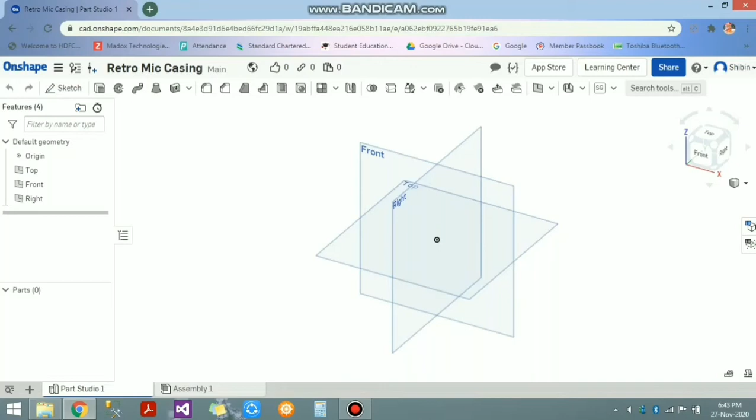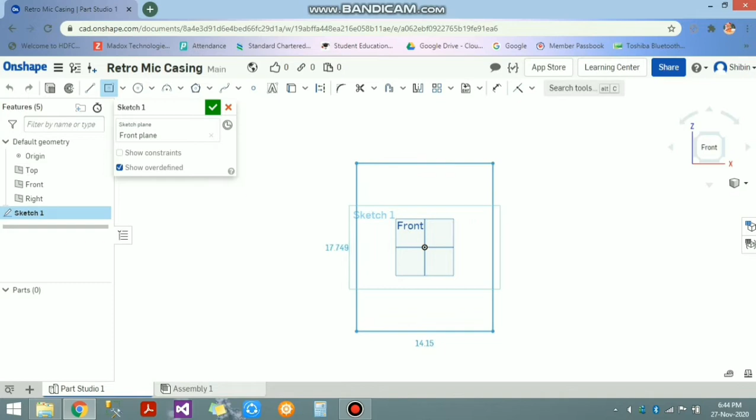There is something really beautiful about retro things, right? So today we'll be making a retro microphone's casing. So start off with the usual steps and click on sketch. Now we'll take a center point rectangle and I'm going for a 10" by 8". So start dimensioning it. Okay, 10, and this one should be 8.

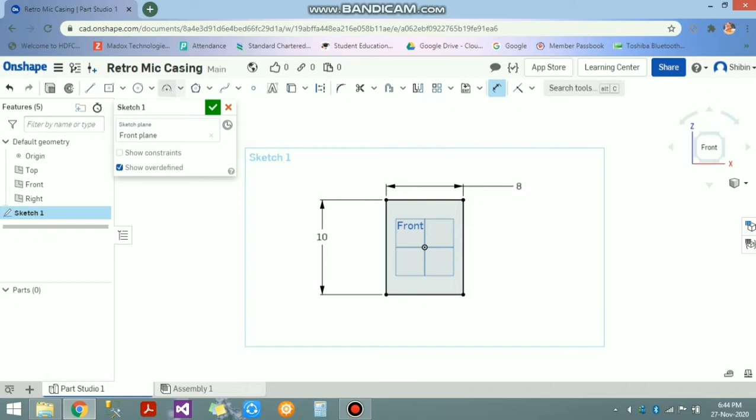Okay, now once that's done, go to arc and select a 3-point arc. First point here, second point here, and don't go for a tangent. All right, this is a tangent. I don't want a tangent, and somewhere here.

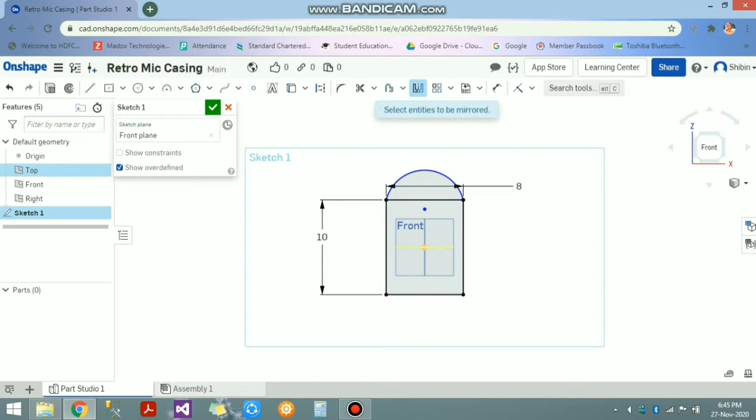Now I need that on the bottom also, so I'm going to mirror it. So click on mirror. It's asking for a select mirror line, right? Click on this line. That's a top plane, and select the entity. That's the arc. Okay, we got it. Now let's remove the unnecessary ones. That is this one. Okay, so this is a sketch that I wanted.

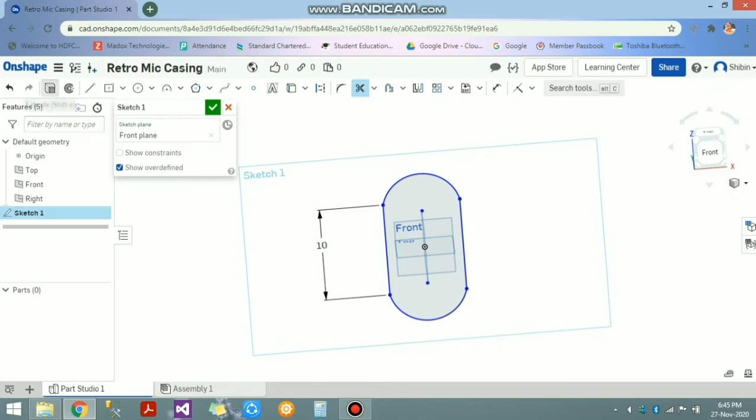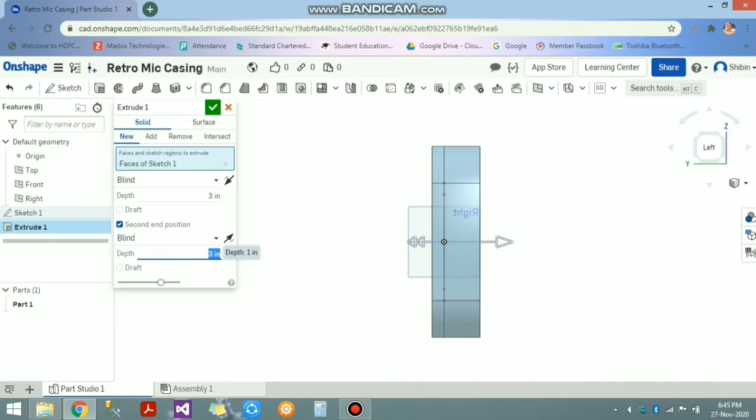So let me just extrude it. Now I go for a 3". Now what if I want another 3" on the opposite side? So you can see an option here, right? Second end position. Click on that. See, there is one extrude happening on the opposite side also. Mark that also 3". And this is what I want.

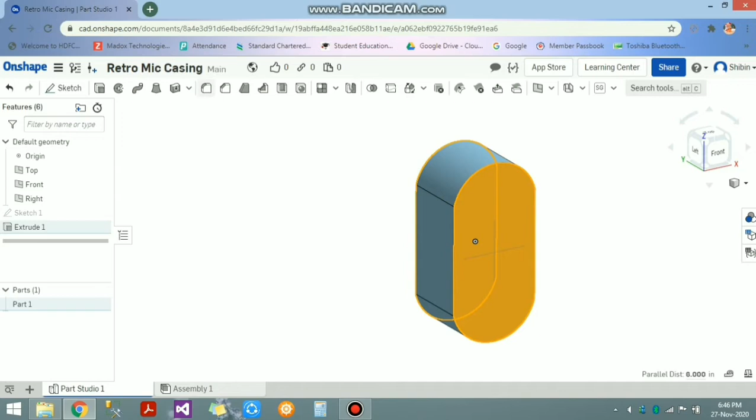So now I want to fillet the faces. So I'm going to select this face and this face and just click on fillet. Already showing 0.2". I'm going for a 1. I don't think 1" will do. I'll go for a 2". Yeah, that's perfect. So just confirm that.

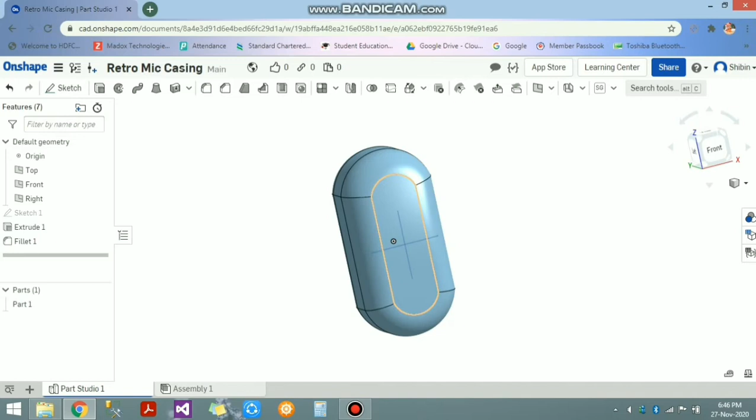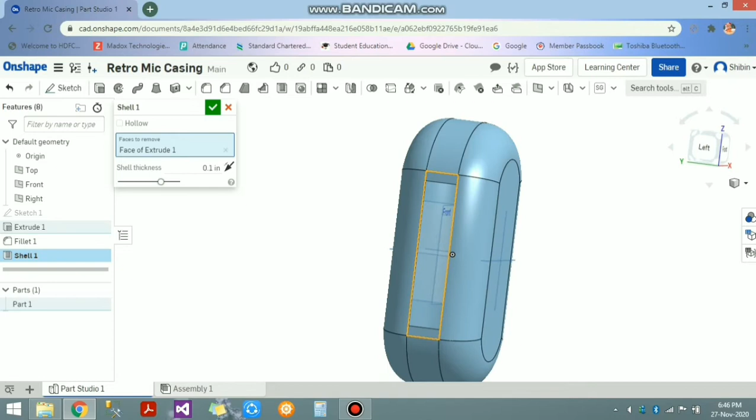Now I want to shell it because it's a casing, right? It will be going over the top of a microphone. Let me try it from this side and this side. Okay, it's not happening, so I'm just going to scrap this part, and I'll try to shell it from the bottom. Okay, so I'm only shelling. I want to make it hollow, and I want it at the bottom. So that's done.

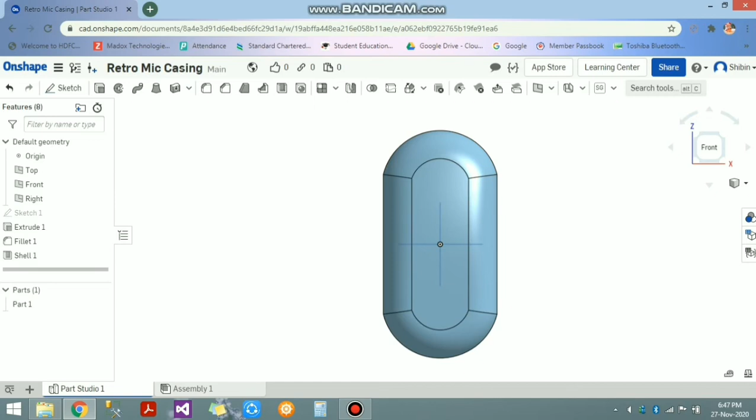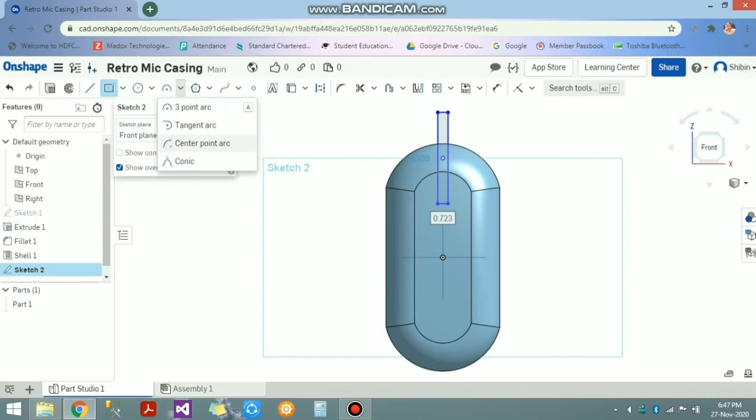Alright, so now I want some cutout portions on top and on sides, so I'm going to do that right now. So select this plane, the front face of that microphone, and go for a center point rectangle and create this shape. It's okay to go a little top because we'll be eliminating that part anyway. And go for that arc and select tangent arc. So I want a curve that will be tangent to that line and this line. So that's selected.

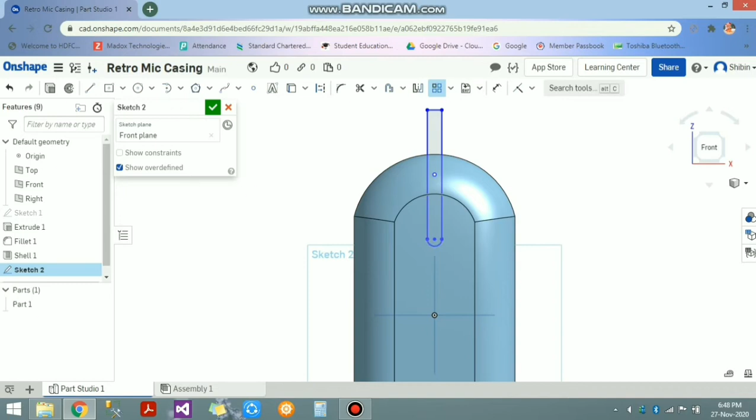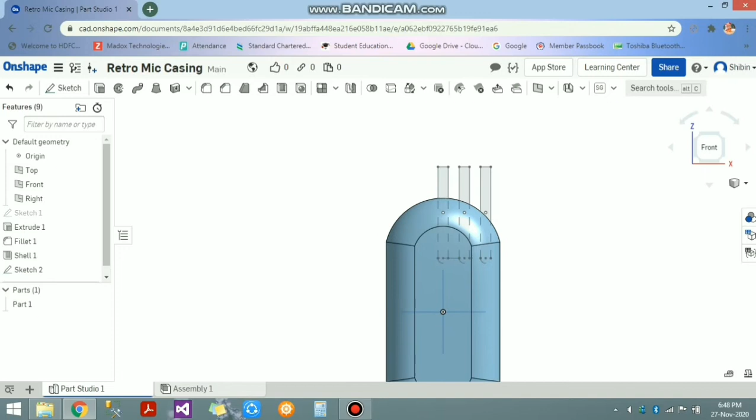Now let me just cut the width of the rectangle on this edge. Okay, and this is the shape that I wanted. Now I want it to repeat itself, so I have already selected a linear pattern, and you can see here that is the distance between two. I'm going for 1.5", and that is 3 times, meaning that for the selected sketch there will be 3 of them. Okay, so now that is done.

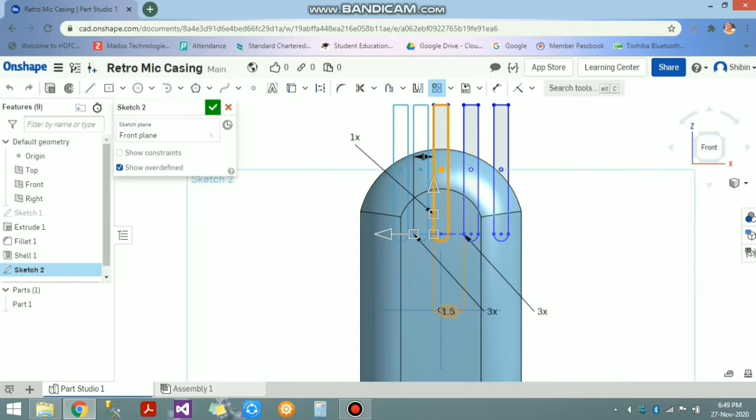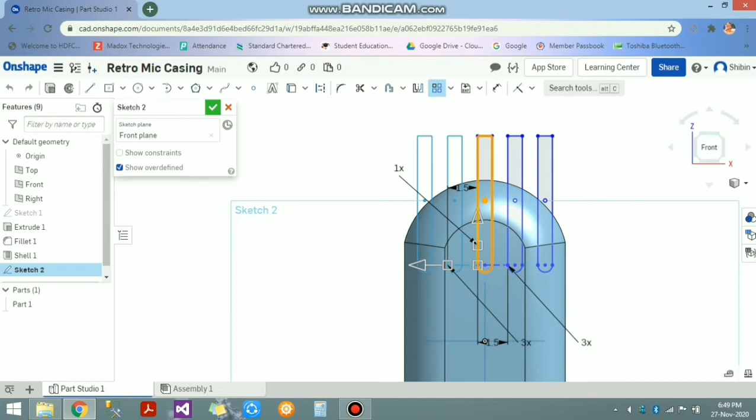I also want the same thing on the left side of it also. So again I'm going to select that same sketch and select that particular sketch that I want to repeat and click on this arrow, so it will turn to the opposite side. All right, now again we'll be doing the same thing. Where is that length? Oh, there it is. So make it 1.5, just like the earlier sketch. And we are actually making this on the same sketch, as you can see, so that we can cut it simultaneously. So I have all the sketch on the same plane.

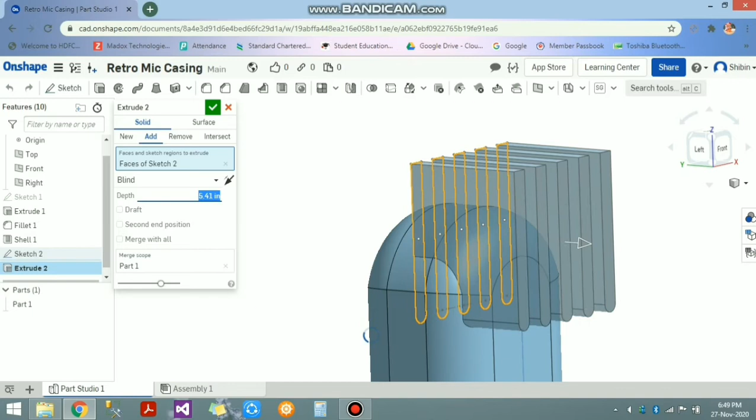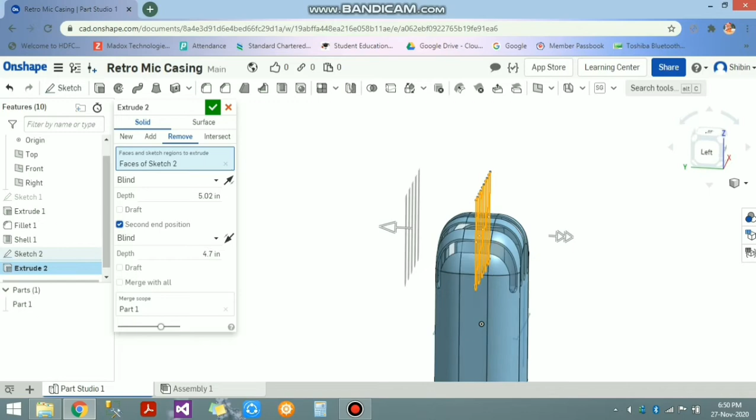Now click on extrude. Now instead of adding, as you can see, it's adding now, right? Now we want to eliminate those parts, right? So I'll be clicking on remove. As you can see here, see that portion, that sketch is actually cut from that part. Now I want this to happen on the second side also. So I'll click on second end position and extend it further. You can adjust it manually or by typing whatever value you want there. See, now we have a nice cut of that microphone.

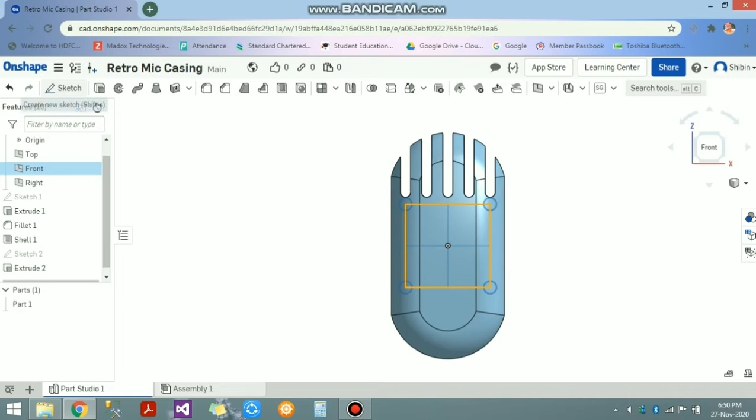Now once that's done, I want a few cut portions on its left and right side. So I'll select front view, but then there's a problem with selecting a front view. So instead of the front view, I'll be selecting the front face of the microphone that we have just created. That's selected, and sketch number 3 should be another rectangle.

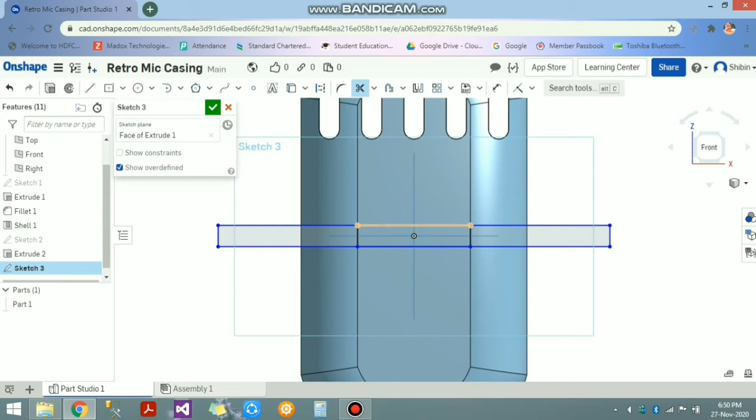So it's a center point rectangle, just like the earlier one. I'm going to make another center point rectangle right here till the edge of that face. And I'm going to cut these portions out. Okay. Now I'm going to repeat these two portions.

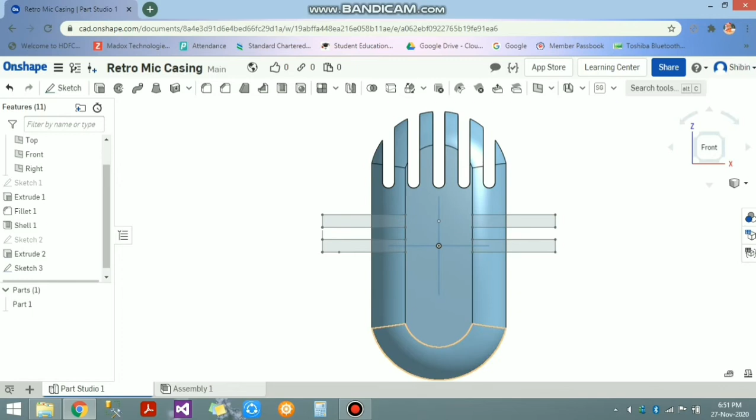Earlier sketch. Now I don't want anything on the horizontal side, so I'm going to keep it 1x. But I do want on the vertical side. So let me just go for a 2 and change the distance between those sketches as 1.5. All right. Now we'll again repeat it because I want those portions on the bottom side also, right?

So again, select sketch number 3, select linear pattern and select these two sketches, just these two. All right. Now again, convert these to 1 and change this to, let us zoom in on that.

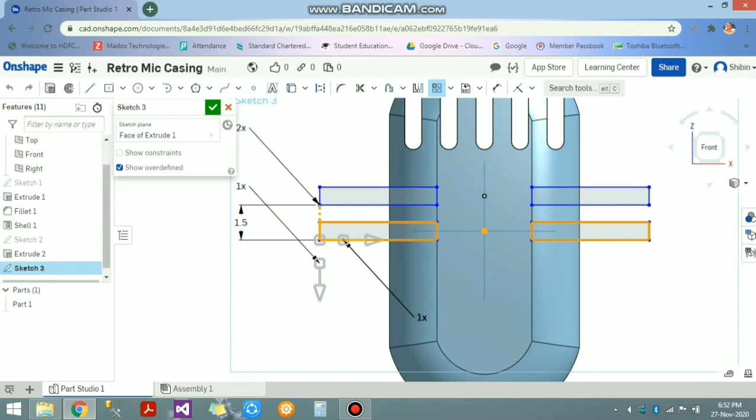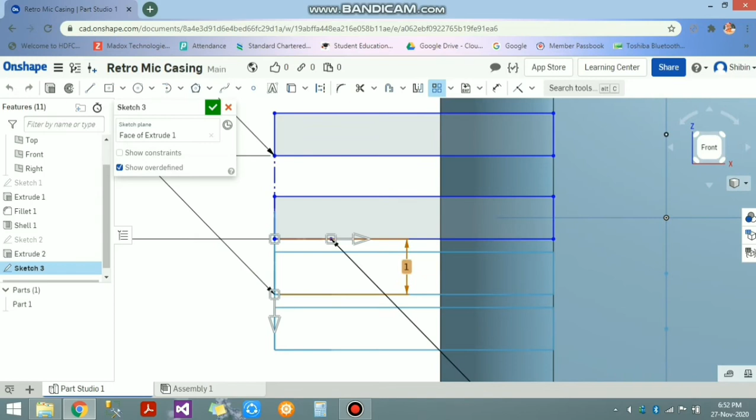Okay, sometimes it might appear a little confusing, but don't worry, with regular practice, you will be an expert in this one. So yeah, that should be 3x. And this is the length right here, and that should be 1.5. Okay, now we have got to our objective.

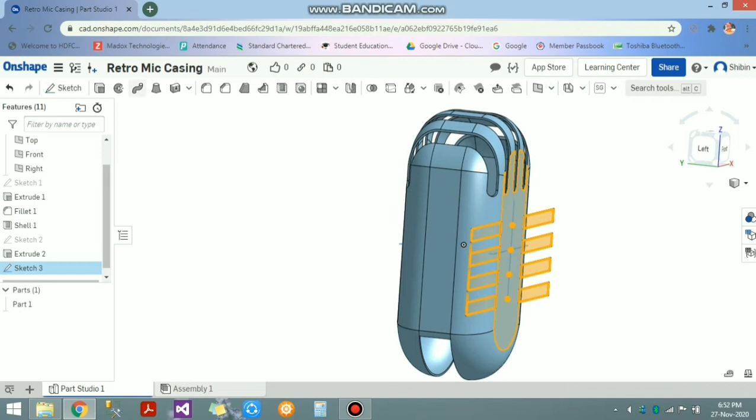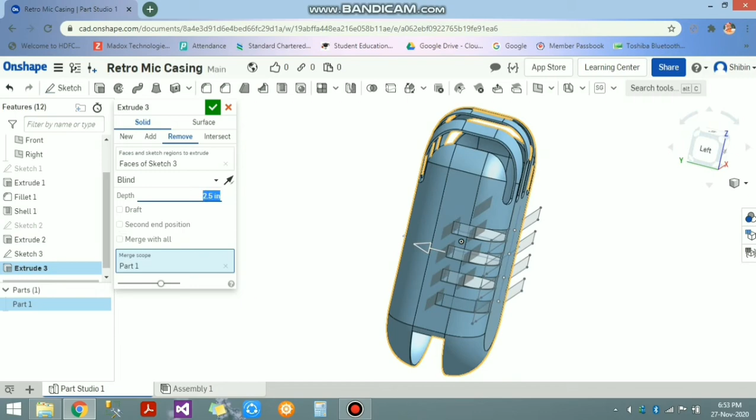All right. Okay, now we got those sketches and we'll cut out this portion. So we'll select extrude, and instead of new, we have to remove these parts, right? I've cut those portions. I'm going for a blind depth, but I don't think I want 3 inch. Let's see how 2.5 works out. I think 2 will be great. Yeah, that's exactly what I wanted.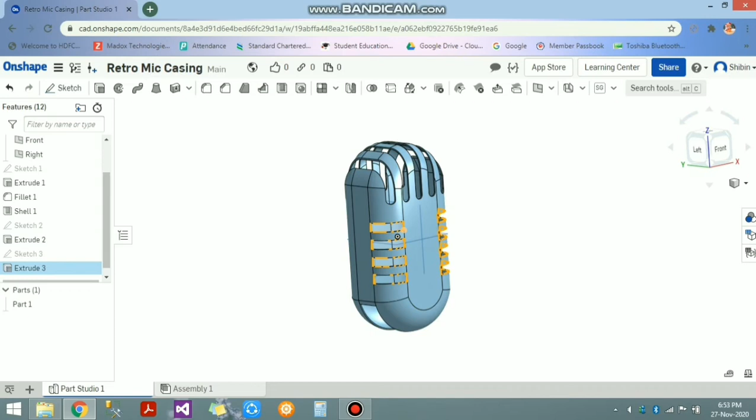Okay, now I want these features, these cutout portions on the opposite side also. So what can be done? I don't want to sketch it again. Okay, so you can actually do the sketch also, but it will unnecessarily take time and effort. And as a designer, your productivity will always be counted upon. So the less time you take, the better. So we'll take mirror.

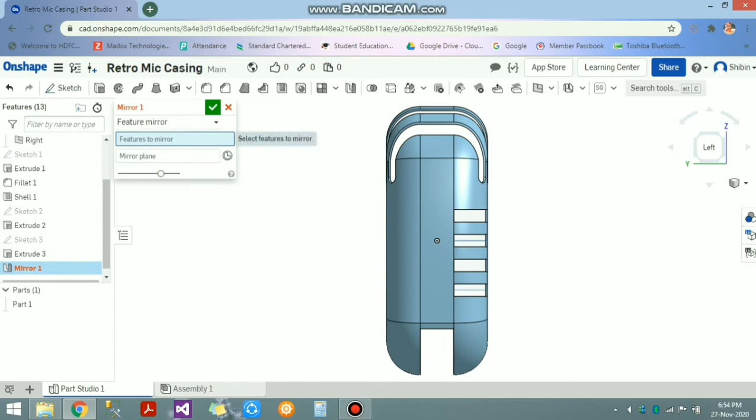Now select mirror and now you can see it's showing part mirror, right? Now we don't want to take part because it's an extrude, right? So it comes under feature. It's not a part. So now it's asking what you want to mirror. So select extrude 3 and now it's asking for mirror plane. So select on mirror plane and click on front.

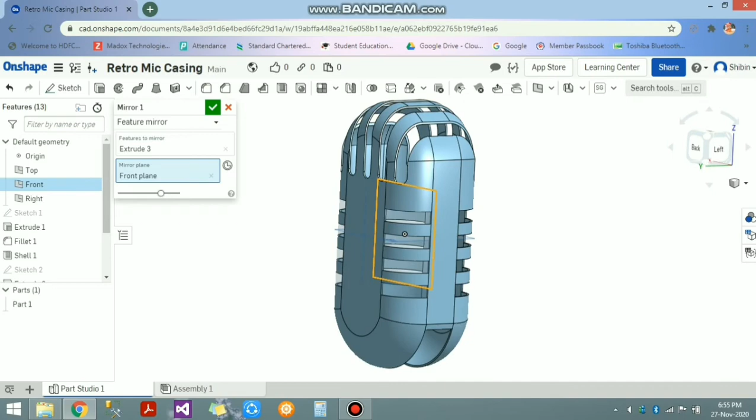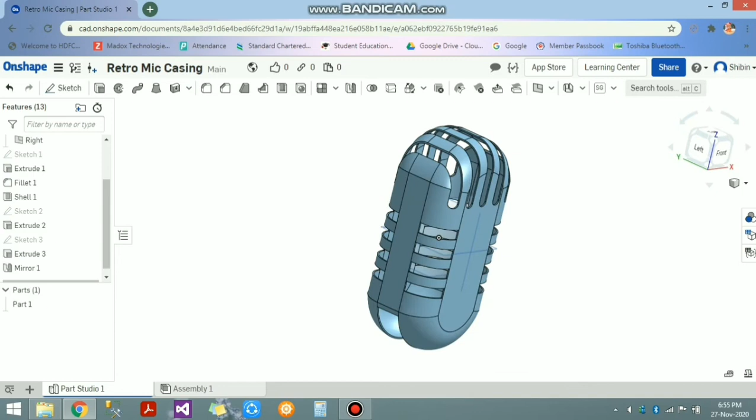See, now that same cutout portion has repeated itself here. Okay, let me see a 360-degree view of all those things. Now let me just try to change the color of it. I can go for silver, any shade of silver. If you're funky, go for blue.

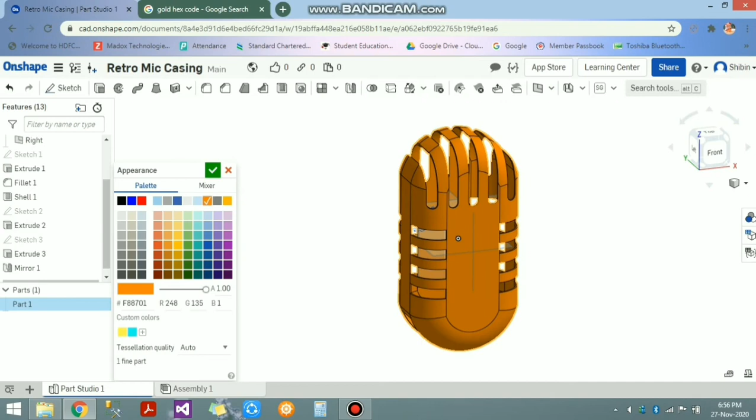And you can go for some classic golden yellowish color. I've seen retro mics in that color actually. If you want to give a color which is not available in the palette, you can actually go search gold color hex. Now you can see a lot of hex codes here for gold, yellow. Now click on that and just paste it right here, right under the color. You can select any hex code from any database that you have and just paste it here. It will give you that color.

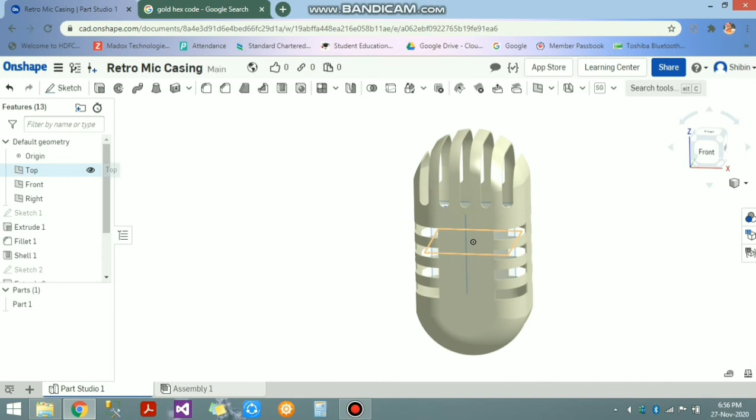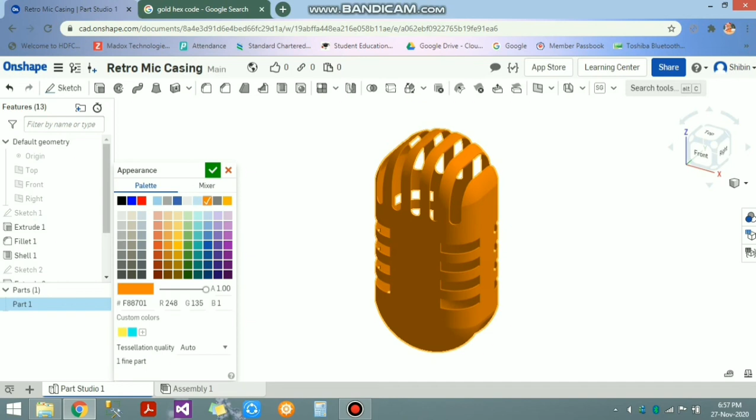Let's go for photorealistic view right here. Okay, I'm going to hide all those planes. Okay, it's not visible, so I'm going for a silver gray color. Oh, golden looks really beautiful right here. So go ahead, pick any color of your choice that, well, matches your style. Well, it does look good and structurally strong enough to hold when you're making that passionate speech or your passionate singing performance.

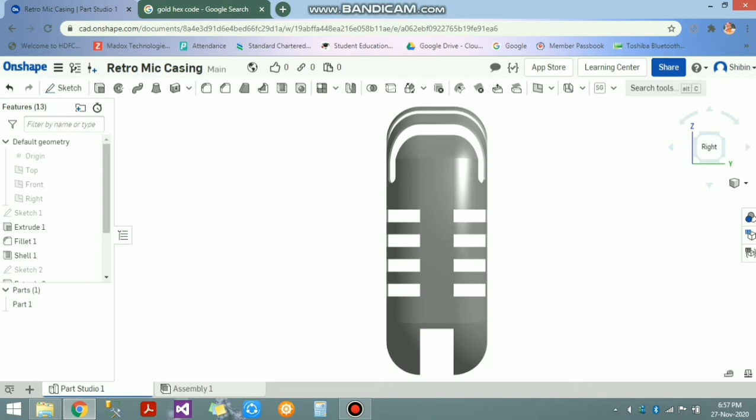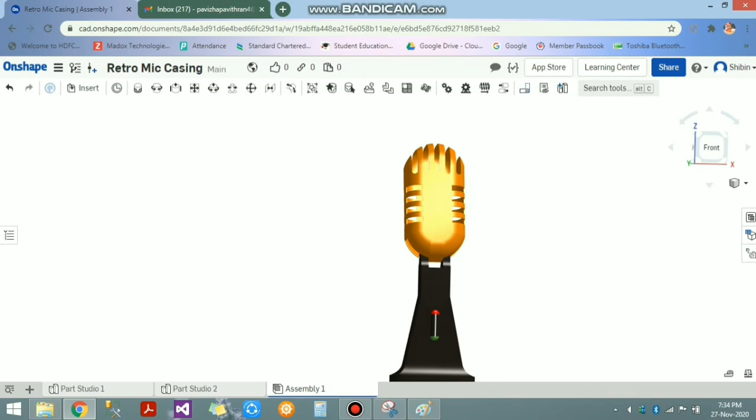So go ahead, put that mic on a stand, turn it on, adjust according to you, and speak your mind out or sing your heart out, because today's lesson is dedicated to Charlie Puth for creating such amazing songs.